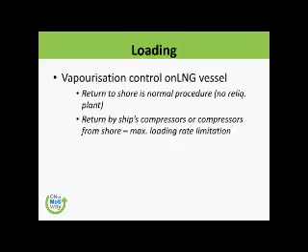But let me explain that this happens on big ships. If you are on a small bunker barge, you may have to reliquefy your own vapor. So in that case, of course, return to your own reliquefaction plant, reliquefy and throw it back to the ship.

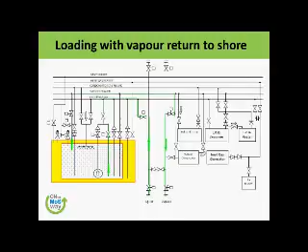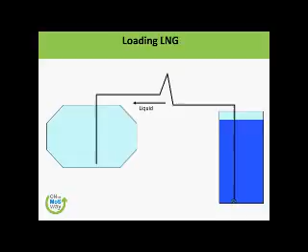And we give the vapor back to shore for reliquefaction or liquefaction. If they do not have a liquefaction facility, some of the terminals just flare it up. They burn our vapor. Nowadays with emissions controls, all the terminals are trying their best to reliquefy the vapor because of course it is money, it is cargo. So they will reliquefy and put it back into the tanks.

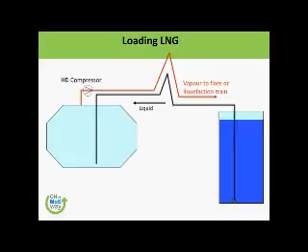So folks, what we are trying to do is take the liquid from the shore into our tank and return the vapor to the shore. And of course, we need to blow it off, so we'll use our compressors to blow it fast to the shore because the vapor may be in bigger quantities.

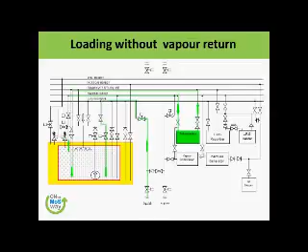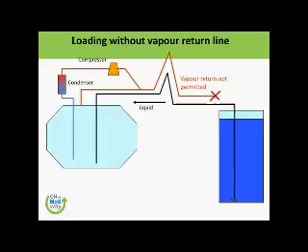So we have both procedures available on the ship, but because reliquefaction is a relatively bigger challenge and it involves a lot of energy, we normally give it to the shore. So loading without a vapor return line, we will not normally use it. In that case, we take the vapor, pass it to the compressor, to the cooling cascade, refrigeration, cooling, and then we'll put it back to the tank.

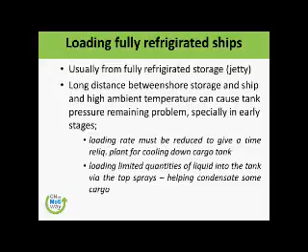Loading from a fully refrigerated storage jetty, a long distance between shore storage and ship, and high ambient temperature can cause pressure problems, especially in early stages. So the loading rate must be reduced to give time for the reliquefaction plant, for cooling down the cargo tank, etc. Loading is to be limited to the quantities of liquid into the tank via top spray, and of course helping condense some cargo.

So normally this was for the non-pressurized vessel. But type C tanks we see very often on the bunker barges. So normally those types of bunker barge, which we have seen on the Viking Grace, need to load under pressure. So they need vapor from shore to purge the remaining nitrogen from the tank and to equalize the pressure between ship and terminal.

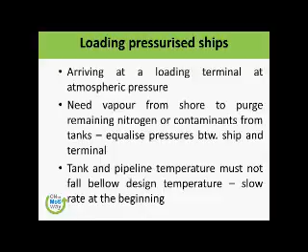And then tank and pipeline temperature must not fall below design temperature. And once our tanks are cooled down, we start loading at a slow rate in the beginning. So the tanks are suitable for minimum temperature, no problem.

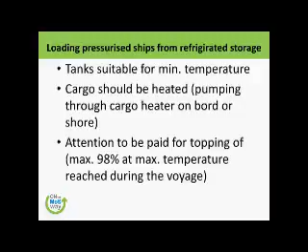Those tanks get cooled very quickly, and they are designed to sustain a high degree of thermal gradient, and of course they are designed for these kind of things. So cargo should be heated, pumping through a cargo heater on board, and once it is done, attention to be paid to maximum 98% at maximum temperature reached during the voyage.

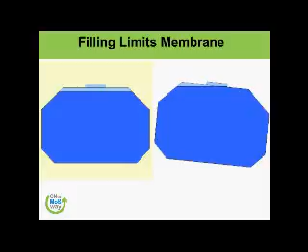So now, since we are talking mainly on membrane tanks or NO96, etc., the filling limit is also one of the biggest issues: how much we may be able to fill. On oil carriers and chemical carriers, 98% is the rule of thumb. But IGC chapter 15, 8.2.17 says if the vessel is 15 degree listed and 0.015 of the length as a trim, the ship can be filled over 98%, i.e. in that case 98.5, because you can see our cargo dome is still empty, so it cannot overflow.

Why are we filling more than 98%? To avoid the sloshing problem. The lower the cargo level, the more sloshing problem there will be. Now, the filling limits of the Moss-Rosenberg, or spherical model, are comparatively higher. Why? Because of the design.

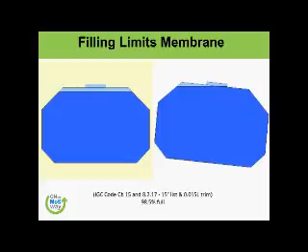In the membrane design, you can see there is a lot of free surface area, and the larger the area, the more the evaporation, because evaporation happens from the top of the surface. So if we reduce the evaporation area, there will be less loss of cargo, less problem. But in a spherical tanker, the surface area of the liquid is very small because of the tank design. So even if the ship is listed 15 degrees to one side, there is not a significant change compared to the membrane tank, where we have a chance of overflowing.

So IGC code chapter 15 again said in its rule 8.2.17: 15 degree list, 0.015 L trim, 99.5%. That is good news, folks, isn't it? We can fill a Moss-Rosenberg vessel up to 99.5 because it is a low density cargo, less than half the density of water. We can put more. Weight is no problem for carrying, so we can fill it to 99.5%, and by filling this amount we can have less evaporation. So that is about the filling.

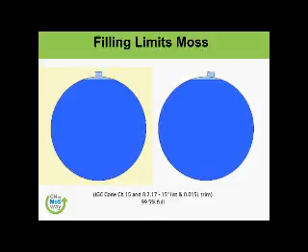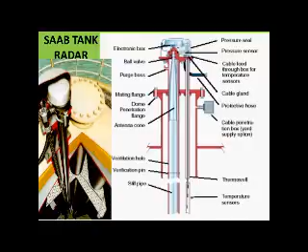So here you will be able to see this. Here is the radar beam which is guided through the pipe. We have multiple sensors ending at different levels to sense temperature and pressure, if pressure sensors are fitted. But the problem now is very interesting: this beam comes down the pipe, and if the tank is nearly empty or empty, it will reflect from the bottom. Fair enough, we will get the reading.

But what if the tank is 50% filled? The radar beam can penetrate the liquid because it is a colorless, odorless, transparent liquid. The radar beam can easily travel through, hit the bottom, and we will have another echo: one from the surface of the liquid, one from the bottom of the tank. And that is an undesired situation. We do not want to know how far our tank bottom is.

So for this, the engineers have come up with a very good idea: they have put a spiky kind of thing, and what they are doing is deflecting the energy in different directions. You also may have noticed that this is the thermal sensor for sensing the temperature. There should be two. I think the other one is on the other side.

So technically this is one thermal sensor, the other thermal sensor, and they are sensing the temperature at the bottom of the tank. The bottom of the tank temperature is very important to us, because in the cooling down process, if our tank bottom temperature comes nearly to our cargo temperature, then we will be able to start loading the cargo. This is what we are going to see in our exercise now, how this thing is happening.

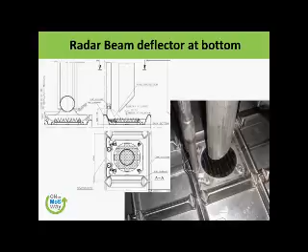Now another furniture of the tank, which is fitted outside of the tank, is a relief valve. IGC Code chapter 5.2.1.6 says that all pipelines or components which may be isolated in a liquid full condition should be provided with a relief valve. Okay, so on LNG carriers these usually relieve back into the cargo tanks. In old vessels, it used to just go into the atmosphere via a knockout drum.

These may usually be set to lift at 10 bar pressure, but again, different manufacturer, different tank design, you will have your own pressure. Very simple: high pressure coming here. There is a gasket here, and there is a spring which is holding the disc under pressure. If the pressure exceeds a certain level, it will press this and get relieved from the pipe.

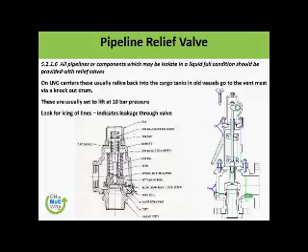Now, at the same time, when we are loading, we are doing the simultaneous ballast discharge operation. So I will show you that in a minute. Let me go on the simulator.

Yeah. Is the mic on? Can you just check if we are hearing well? Okay. So

What we are doing here is that we'll discharge from the system, and at the same time, when the tanks come to the stripping level, we will do the stripping from the tanks, running the stripping system, which I'm going to explain while we are doing the deballast. And now cargo refrigeration and reliquefaction at sea. Once we have completed the loading, this is one of the things we talk about as boil off gas management, which I'm going to talk about shortly.

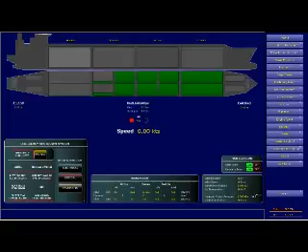And now I'm going to start the simulation where we are going to witness how we can complete the cooling down phase and start the loading of the tank. So folks, I hope now you will be able to see the simulator. And now we have updated the system. You can notice our exercise is running, and we have been doing the cooling for a very long time, obviously.

Now let's see what is the condition in our tanks. Number one thing, we will have to check why we have got a nitrogen alarm. Let's go and see what is happening. Low secondary insulation space header pressure alarm. Okay. Primary insulation space header pressure alarm. So did you notice that our pressure in the interbarrier space has reduced?

Why has it reduced? Because our tanks have cooled down to such a low level. Can you see, at present our tanks are cooled down to minus 120 degrees. We are getting the liquid from the shore at about minus 161 degrees. And as it is sprayed in our tanks, it has gone to such a low level. Now the tank is shrinking.

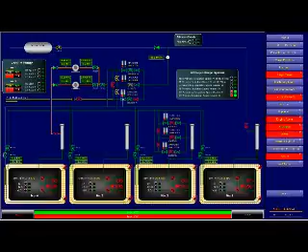Now the pressure will slowly increase in our interbarrier spaces. Okay, so now let's go back to the tanks. This is our number one tank, where top is minus 120.1, the bottom is minus 120.4. Reasonable thing. The tank pressure is about 13.3 kPa. Let's go to tank number 2.

Tank number 2 is in a very good condition. Minus 134, minus 135. At the bottom minus 143, ideal for loading. Did you notice that the second tank is comparatively cooler than number 1 tank, and the third tank is further colder than number 2 tank?

Why number 1 tank is less cooled is because number 1 tank has got a forward cofferdam and there is no tank on the side. So mind that whenever we cool the ship, we are cooling the tanks, and not only the tanks, we are cooling the outside environment also. That is why we have got a low nitrogen pressure alarm. So fair enough, we are getting the cooling, we are using just one spray header. Let's go and check number 4 tank.

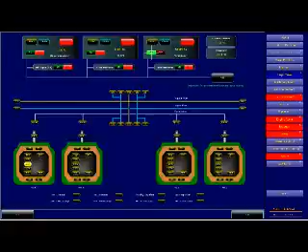It is okay. So now let's set up the line for giving it to the shore, or sorry, taking it from the shore. So very slowly we will open this line. We will not open it fully in the beginning. We'll open it 10-15% because we want slowly to put the liquid in our liquid header. Okay, then what we will do is we will open this valve very slowly. We want the liquid to be introduced in the tank at a very slow rate.

Because again, when it will go inside the tank, let's check again. The liquid coming this way, going this way, and going into the tank. Now slowly and gradually increase. And at this instance now we will be able to ask the shore to increase the pressure on our lines. Can we see we have got a very little flow, just about 41 or 43 cubic. So we will ask the shore to give us more liquid.

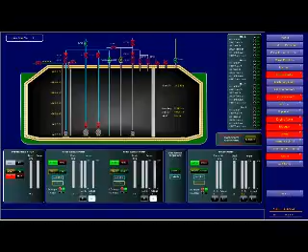Happy, because this is what we opened for draining the valves. You remember? Yes, sir. Draining the line. Sorry. It is okay. There are only 4 tanks. Happy? Yes, sir. Discharge is okay. Loading is okay. So now you need to confirm with the shore that you are doing very well, and we will let it load over a period of time.

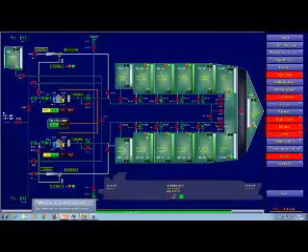Okay, folks, I will let it continue, and we will go to our presentation mode, where now I will talk to you on the further stages of loading. We have already discussed that.

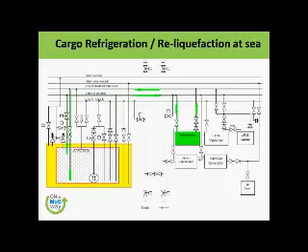Now, just a recap again before we go on with our presentation: we have so far managed to do the drying up of the tank. We have done the inerting of the tanks. We have done the gassing up of the tanks. We have done the cooling of the tanks, and we have also done the loading of the tanks.

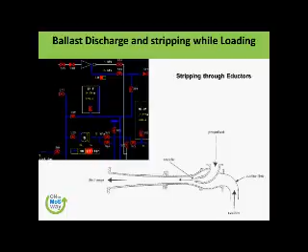Now, the things which are remaining are the topping of the tanks and the discharging at the other terminal or the port or wherever. So let's now press on. We have talked about the deballasting. We have talked about the reliquefaction at sea.

Now, when we are going at sea, after the completion of loading, we need to do the cargo refrigeration at sea if we do not have a boil-off gas arrangement. So what we will do is we run a reliquefaction plant. We should never run a compressor during heavy rolling and pitching because of the sensitivity of the vanes. Condensate is passed through the top sprayers, cooling down, and of course liquid has to be cooled.

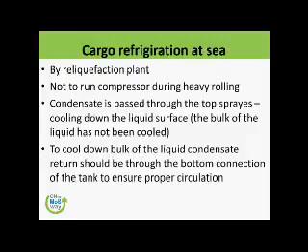To cool down, bulk of the liquid condensate return should be through the bottom connection of the tank to ensure proper circulation. So the reliquefaction plant runs at more than one tank simultaneously. So control condensate return to avoid overflowing the tank.

So what basically you are doing is you are taking the vapor, you are reliquefying it, and you are sending it to the tank. But imagine if you are taking the vapor from all the tanks and the condensate you are throwing to just one tank, the tank might overflow. So you will have to return approximately whatever you have taken from one tank.

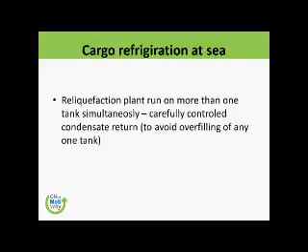So at the same time, we will also have to do at sea any ballast exchange we have got to do. We have already done the ballast exchange when we were coming to the loading port. Now we are loaded and going to the discharge port. So it is unlikely we will do any ballast, but if we have any ballast which needs to be exchanged, we should exchange it. So this is what you were managing early.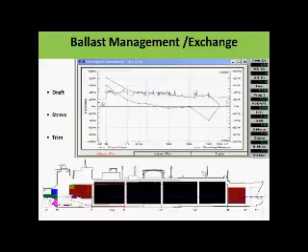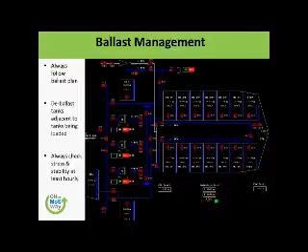So always follow the ballast plan. Deballast tanks adjacent to tanks being loaded. Why are we doing it? We do not want our ballast to turn to ice if it goes below 0 degree temperature. Always check stability every hour. Now we'll come to the discharging operation, and we will talk about it when we complete the loading operation. So just wait a couple of minutes, folks.

Folks, at the moment I'm operating the terminal, and also I'm going to load another exercise where you are going to experience the final topping of the tank and completion of loading. So there we go.

Okay, folks, here we are. We have started the loading, and now we have come to the point where our flow rate is around 3,100 cubics on each manifold. We have got 4 liquid lines connected and a vapor line connected. Now our draft in loaded condition is 10.55 meter forward and 10.72 meter aft. The rest of the other things are doing very well.

Now we have got certain alarms. So let's check at the topping stage what our alarms are. So let's see the ballast alarms. We have stripped the tanks. We have hardly anything in the tanks, so we have got these pumps running. So those tanks which we have already stripped and are empty, we will acknowledge their low level alarms, so we are not being distracted by the other things.

At the moment, we have got these 4 tanks being discharged. This tank has now completed stripping. So we'll close this valve. This tank is nearly completed. So stop and close this valve, and acknowledge the alarm. Happy, young man? Yes, sir. So now all these tanks are virtually stripped.

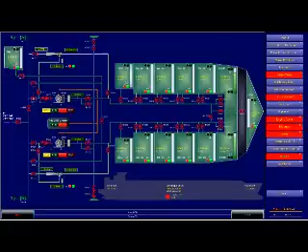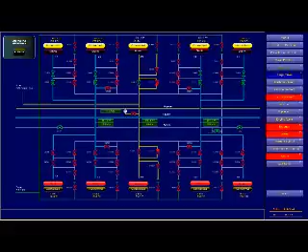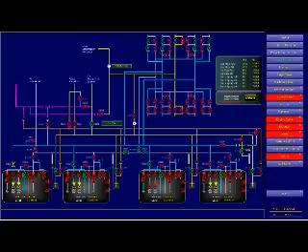Now we have got a cargo tank alarm coming. Let's go quickly and see the condition of the cargo, which tank is closing. At this time, we will ask the shore to slow down the cargo. We will slow down cargo. Bear with me for just a couple of minutes. We can see the cargo tanks here. We have an alarm from the tank. Level is getting high and we need to be standby. So I'll ask the shore to slow down the cargo and we can individually measure the tank.

This is the tank level we have got in this tank. So we are more worried about number 4 tank. So let's see what is in number 4 tank. Are you happy? Yeah. Come on, say loudly. Yes, sir. So can you see we have got some room in this tank? We will decide what is our final ullage earlier on. At the moment my tank is 94.7 filled. Okay, and we will ask the shore to slow down the cargo now, because for topping off we need to slow down. This is again a 94.5.

Let's see our forward tank. If you have got too much of trim, that's why we have got little ballast in forward. If you have too much of trim, then of course your number one tank is the least one. Okay, so the first tank which is going to top off is your number 4 tank, which is now nearly 95% filled. The tank pressure is running okay.

So now can you see we have got a high tank pressure alarm. So let's go and check our compressors, how well they are doing. We have got the vane set to -6.5 and flow of this. So we have this tripped. So we need to start this compressor. Okay, yes. So the flow will go out faster. Can you see now? Here the flow is increasing. So you see these alarms are very important for you.

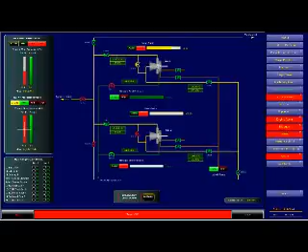Now this bypass is closed and you can see the flow to the shore will automatically increase, and after a little while, because normally you always get the pressure alarms. Now you can see the pressure should drop here, or at least maintain on the same level. Still going high. So can you see the pressure relief valve is opening, which is not a very desired situation. So what we need to do, we'll need to slow down the loading.

So just call the terminal. Terminal, come in? Yes. We need to slow down the loading. We need to slow down the topping up. For the topping now? Yes. Okay. I'm trimming down my tanks, and also I'm trimming down my cargo.

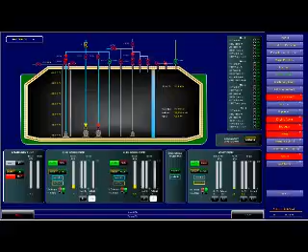All right, my virtual learners, I will take a leave from you here at this moment, and I'll pay attention to my local students here, because they are coming to a very critical stage of topping off, and I'll let them top off the tanks, and I will be working on the terminal control stations where I will be adjusting their flow rates to different ships or different workstations.